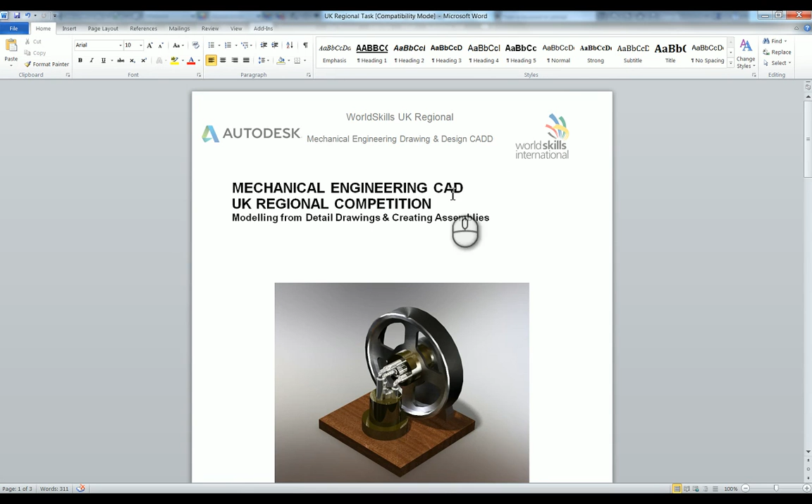So you can see here, this is the Elbow engine, okay? And if we go down, all of the tasks should be set out the same. So at the top you've got the task, which is going to be modelling from detailed drawings and then creating assemblies. The time you have to complete all of this is 6 hours. What you are given is the part drawings. So each of these individual parts that make up this engine, you'll be given those drawings.

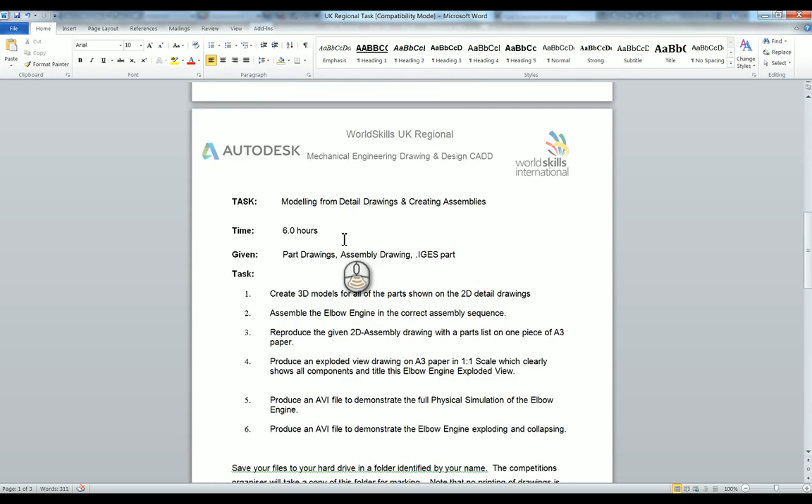There'll be a main assembly drawing, and there'll be a single IGES part, which is for the bolts that go underneath the base plate. So the task is to create 3D models for all of the parts shown in the 2D detailed drawings. So you'll get given all of the drawings. You need to make sure that you've modelled a part per drawing.

You then need to assemble the Elbow engine in the correct assembly sequence, and the correct assembly sequence is very important. So if you go and watch the marking video, you'll understand what I mean. But if you basically copy the assembly sequence that is shown to you on the assembly, then that will be the correct way of doing it. So you basically want to build it as you would in real life.

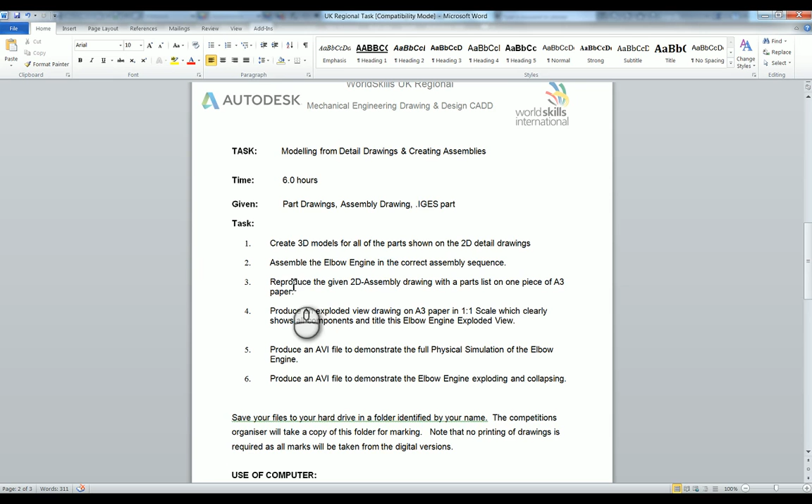You then need to reproduce the given 2D assembly drawing with the parts list on A3 paper. Again, when it makes a point of A3 paper or scale 1:1 down here, you need to take note of that because you will be marked against that. So you need to reproduce the assembly drawing. And whenever in WorldSkills you're asked to reproduce, you copy it exactly, pretty much, okay?

And then number 4, you need to produce an exploded view drawing on A3 paper in 1:1 scale, which clearly shows all components, okay? So that means that nothing's overlapping, you can see all the parts, there isn't a screw hidden behind something. And title this Elbow Engine Exploded View. Again, you've been asked to give it this title, so make sure you do.

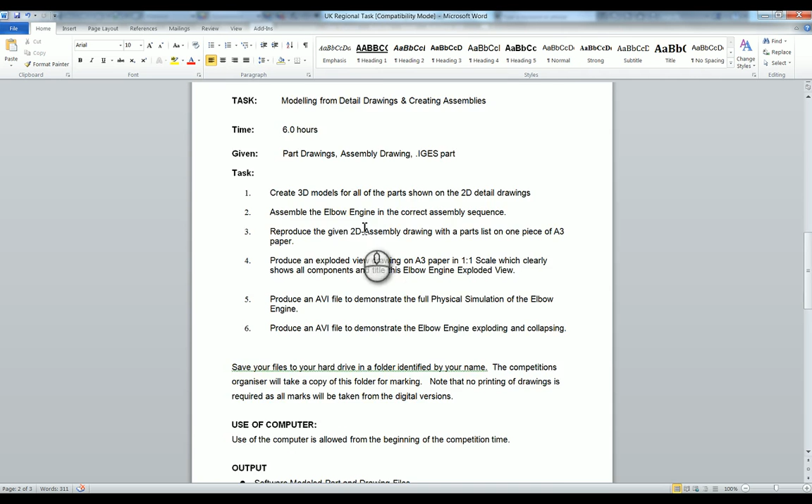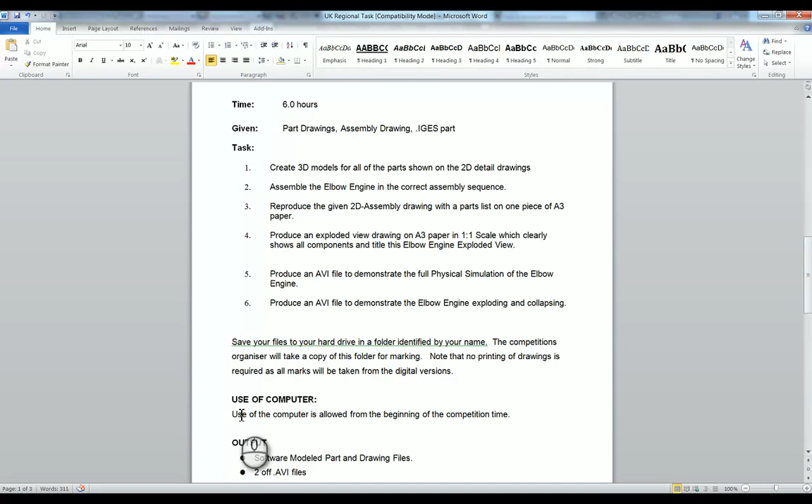Number 5, you need to produce an AVI file to demonstrate the full physical simulation of the Elbow engine. So that means, if I just scroll back up, you need to have the flywheel going round with the pistons going in and out, okay? So it needs to show at least one full revolution to show the full physical simulation of the part. You then need to produce an AVI file to demonstrate the Elbow engine exploding and collapsing. So you need to go into presentation file and set it up so it explodes and collapses, okay?

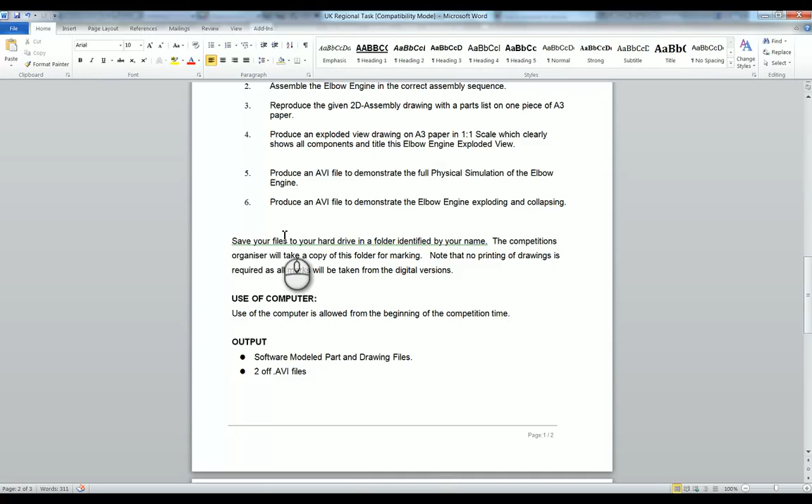It then tells you here to save your files onto your hard drive into a folder identified by your name. So normally at a competition, the first thing you would get the competitors to do is they'll have sort of 5-10 minutes to go through this. They can then ask any questions. So again, if you do have any questions, feel free to get in touch.

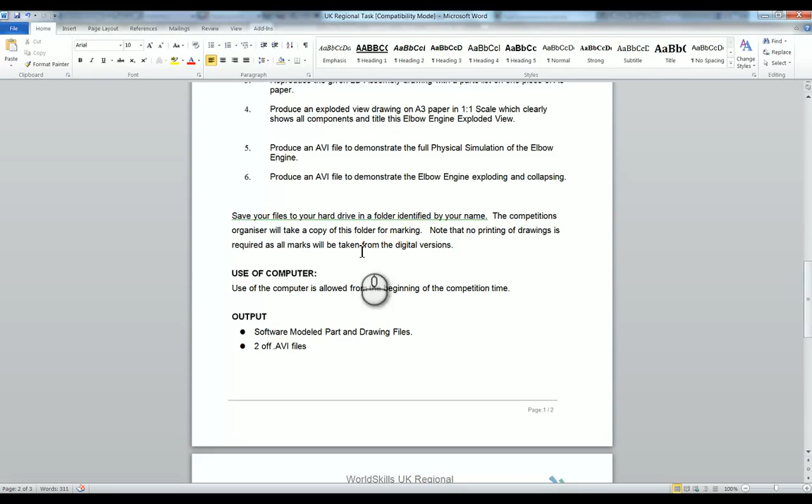The competition organiser will take a copy of this folder for marking. So that's what happens at the end of the day. We'll just take that folder off your computer. If it's not in that folder, then you may not be marked on it. You may lose a lot of marks. So make sure everything you do is in that folder so you can set up a project. Note that no printing of drawings is required, as all the marks will be taken from the digital versions. So we literally take that folder and mark straight from your Inventor files. We don't need a paper copy.

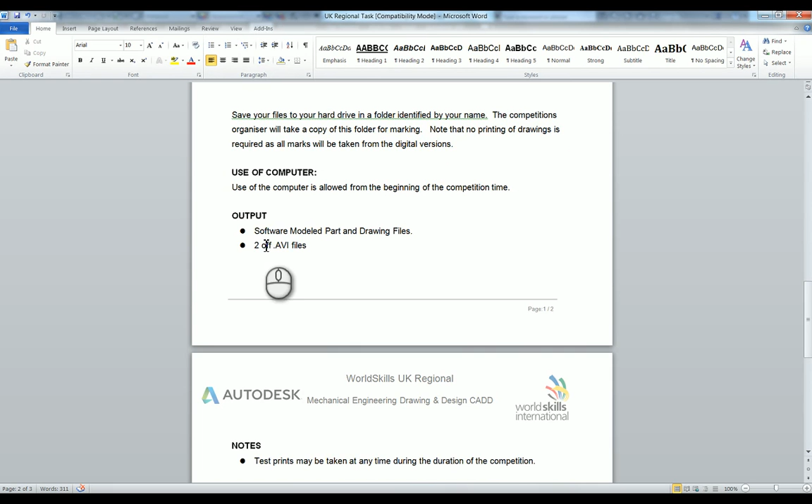The use of the computer, so you are allowed to use the computer from the start until the end of the competition. And output, this is the most important thing for you guys, so software modelled parts and drawing files, so that's what you need to be making. And you also need 2-off AVI files. Notes, test prints may be taken at any time, so if you find it easier to go through your drawings on paper, then by all means, please print them out and have a look.

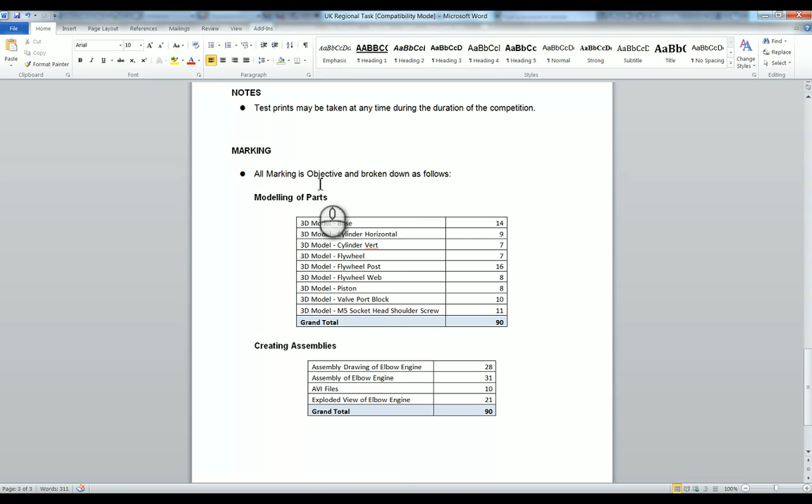And then this is the bit you really need to take note of, especially if you're struggling for time. So marking. So all the marking is objective, and you can see here where all the points are. So for example, let's look at the modelling. The flywheel post is 16 marks, and the flywheel is 7 marks. So that should say to you, you need to spend about twice as much on the post as you do on the flywheel. It's because the post is a lot harder than the flywheel.

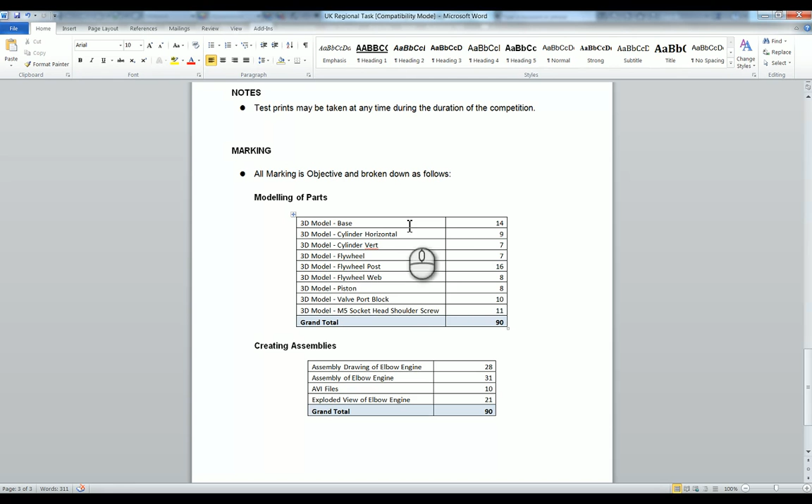But you need to look at here and just work out, if you're struggling with one part, don't spend 1 hour trying to model the cylinder vert, just carry on to the next one, because you can see there's all these points here that you need to be picking up. And then if you go down here into the assemblies, so you've got making the assembly drawing, you get 28 marks for that, and just assembling the model, a .iam, you get 31 marks.

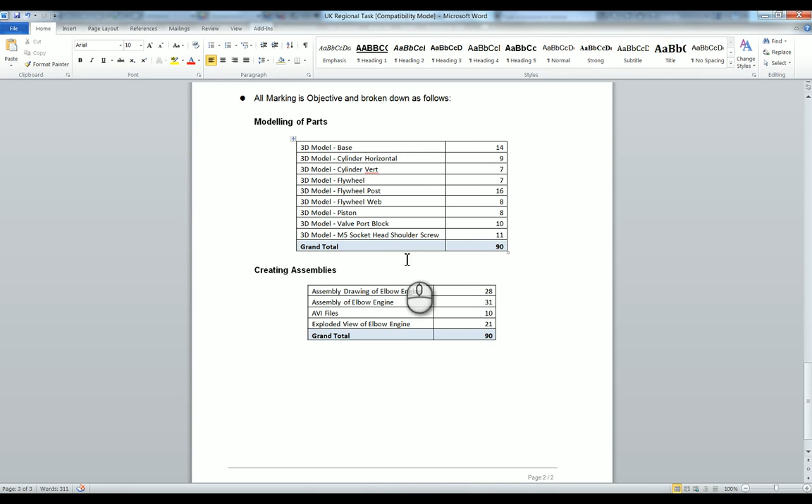And you can see here your AVI files are only worth 10 out of 180 marks. So if you don't know how to produce the videos, of course you want to spend your time trying to pick up the marks everywhere else. But online now there is a video of how to do all of this step by step narrated, so hopefully you'll be able to work out how to do all of this. But that is basically the task to help you to produce this elbow engine.